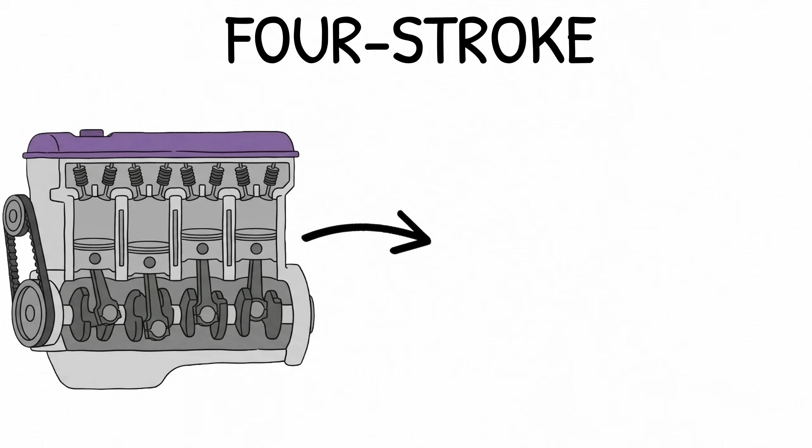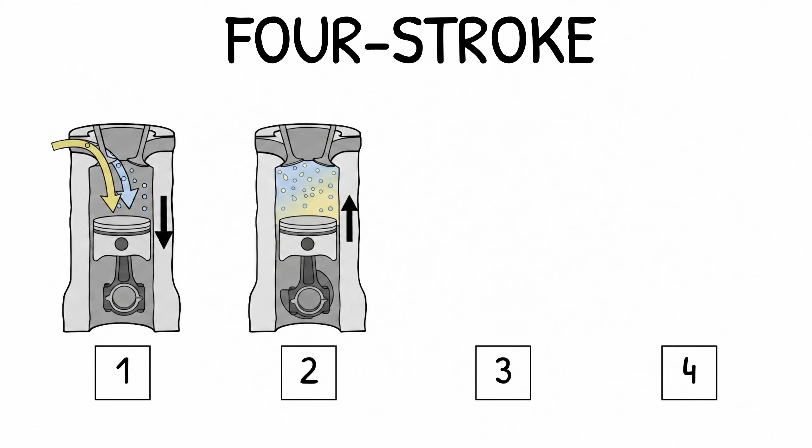Gasoline four-stroke. The engine in most cars runs on a controlled explosion, about 25 of them every second just sitting at idle. A piston drops and pulls in air and fuel. It rises and crushes them into a space the size of a shot glass. A spark hits, bang, and the blast slams the piston back down. It rises once more and shoves the burnt gas out.

Two-stroke. Same explosion, half the steps. It fires every time the piston comes up, instead of every other time. So it makes nearly double the power for its size. That's why it's in chainsaws, dirt bikes, and outboard motors.

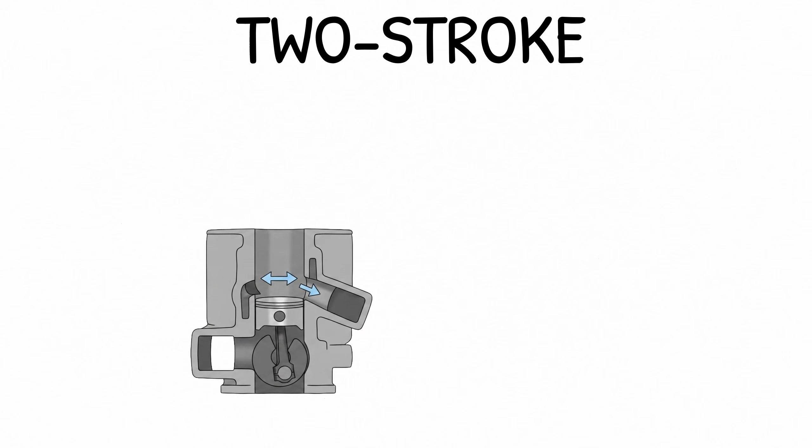The catch is how it breathes. Fresh fuel and burnt gas share the cylinder for a moment, and some fuel escapes unburnt. That blue haze, that smell, that's you literally throwing money out the exhaust.

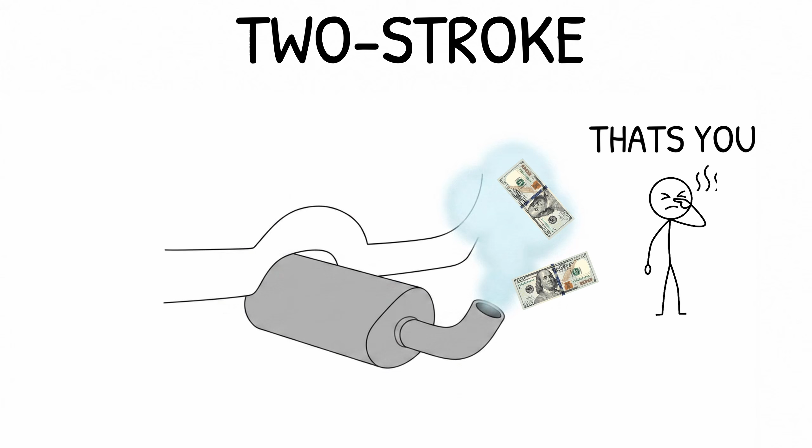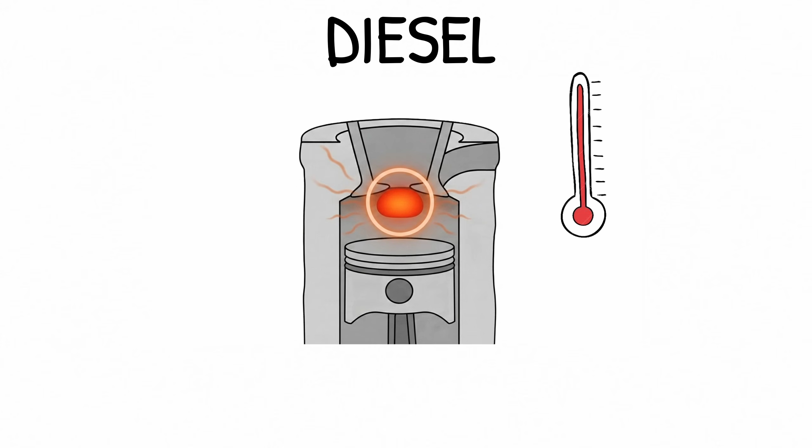Diesel. Now take the spark plug out and throw it away. A diesel never lights its fuel. It crushes the air so hard, so fast, that the air itself turns hot enough to set the fuel off the instant it sprays in. Pure pressure. Nothing to spark, nothing to fail.

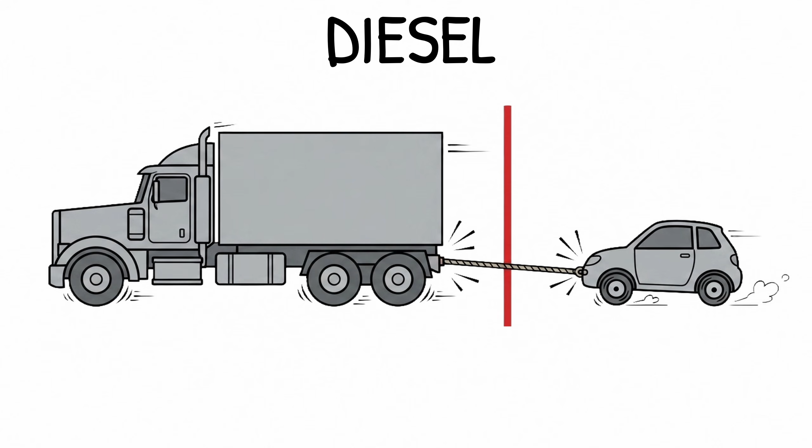Which is why a diesel runs 500,000 miles and outpulls a gas engine down low. It's under every truck, ship, and train you've ever been stuck behind, and it clatters because inside, it really is a chain of tiny, hard detonations.

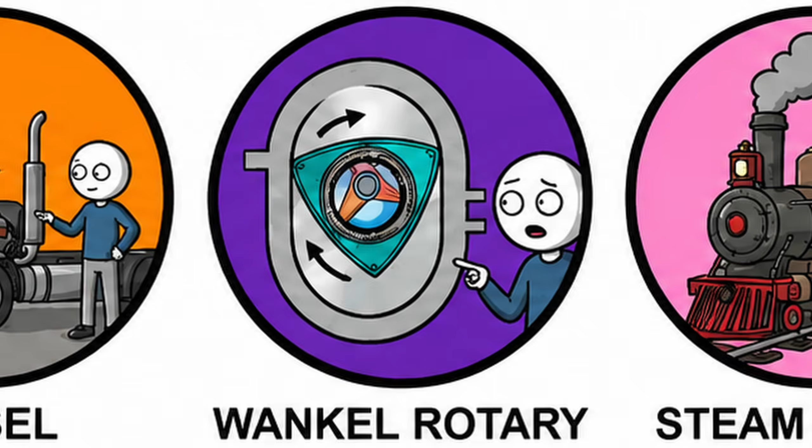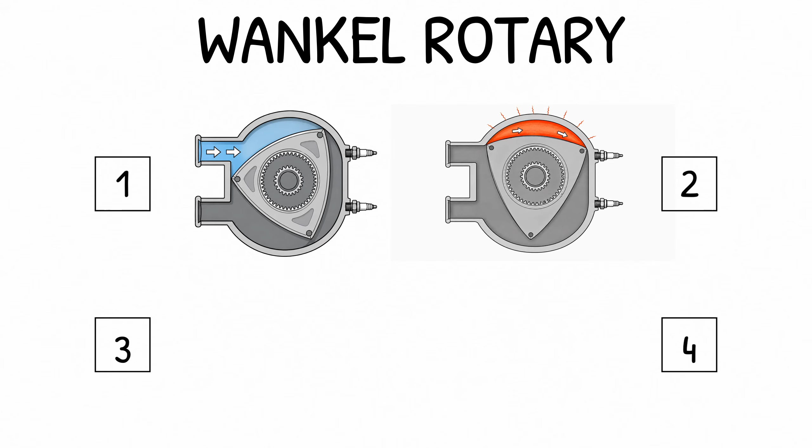Wankel Rotary. And here's the first one that ditches pistons entirely. No pistons, no up and down, just a rounded triangle spinning inside an oval, and the three gaps around it suck, squeeze, bang, and blow as they sweep past. It's tiny, dead smooth, and screams to 9,000 RPM.

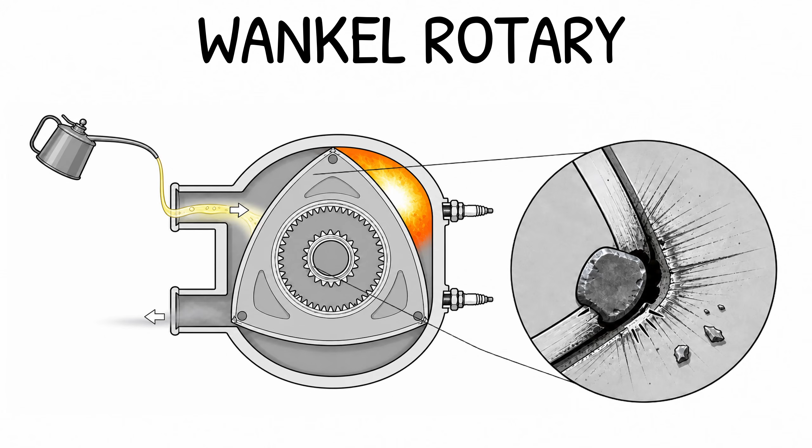Mazda loved it. It also burns oil on purpose and chews through its own seals, which is why almost nobody else builds one. Steam engine.

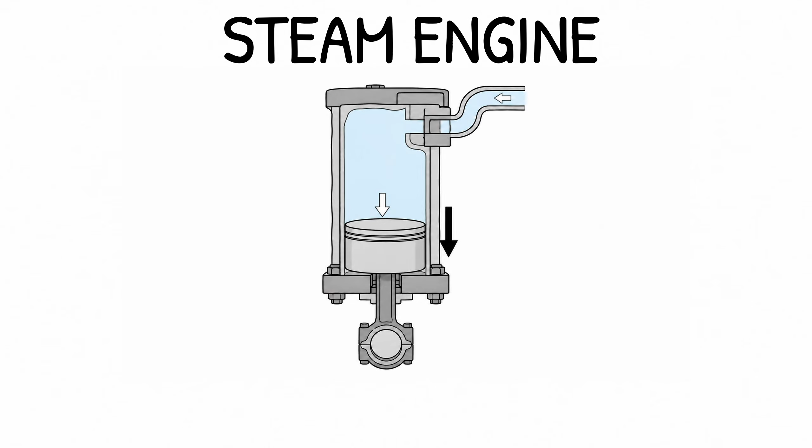Rewind 200 years. Every engine so far burns its fuel inside the cylinder. Steam burns it outside in a fire under a boiler, and all that fire does is boil water. The steam expands, shoves a piston, and that's the whole industrial revolution in one sentence.

Slow, enormous, forever to warm up, but it runs on anything that burns, coal, wood, literally garbage, because the flame never touches the moving parts.

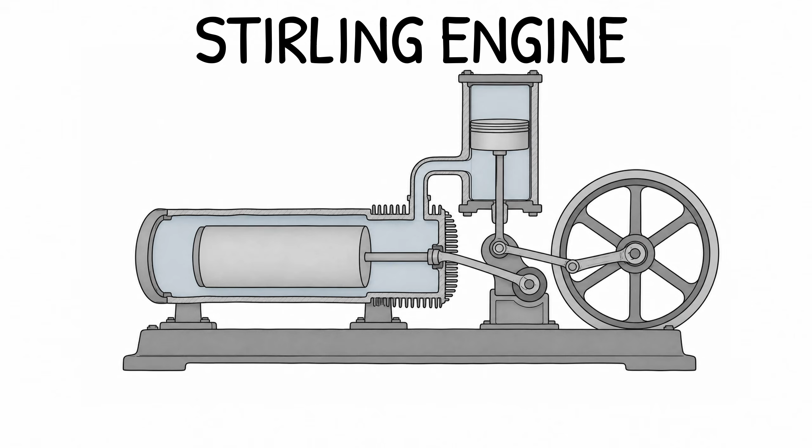Stirling engine. Seal a gas inside, heat one end, cool the other, and as it swells and shrinks sloshing between them, that alone drives a piston back and forth. No explosion. No exhaust. No sound. Some are so delicate they'll spin on nothing but the warmth of your hand on the base.

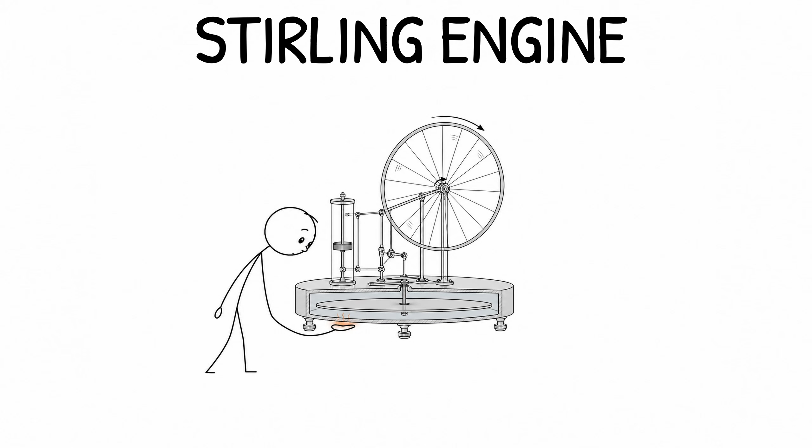Silent, and nearly unbreakable. Which is why it hides inside submarines and spacecraft, where noise or exhaust gets you found.

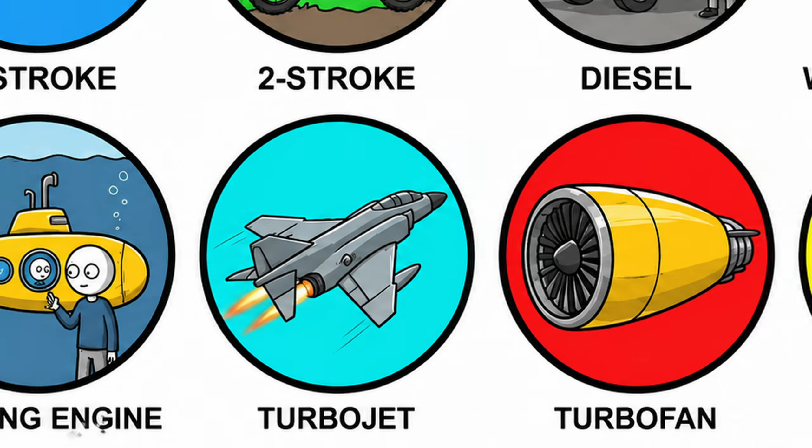Turbojet. Now everything speeds up. Air pours in the front, a compressor squeezes it, fuel burns in a nonstop roar, and the blast tears out the back, spinning a turbine on the way that drives the compressor up front. It feeds itself. No pistons stopping and starting, just one smooth river of fire.

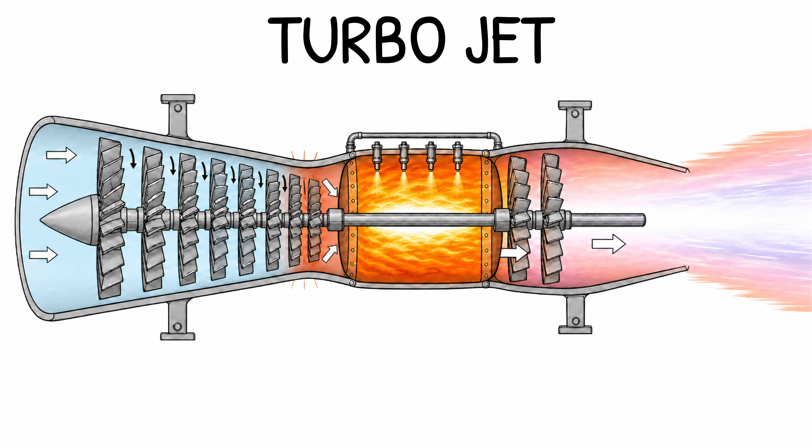This is the engine that put fighter jets past the speed of sound.

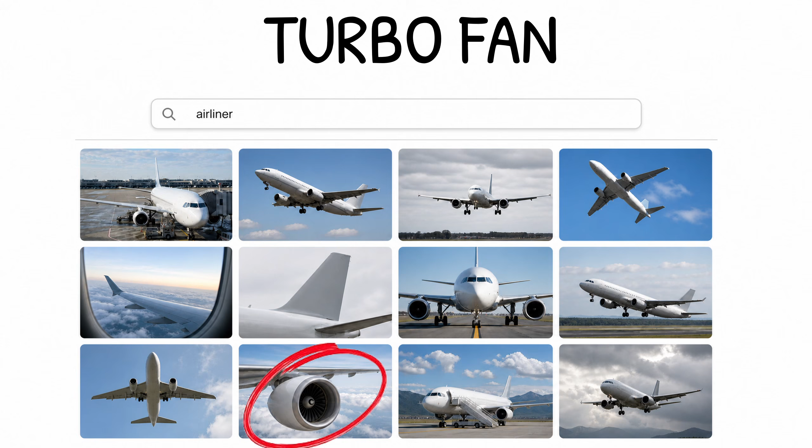Turbofan. Look up at any airliner, this is what's on the wing. It's a turbojet with a giant fan bolted to the nose, and here's the twist: most of the air that fan grabs skips the fire completely and gets shoved backward around the outside. That cold bypass air is quieter and far more efficient at cruising speed. The screaming jet core in the middle is now mostly just there to spin the fan.

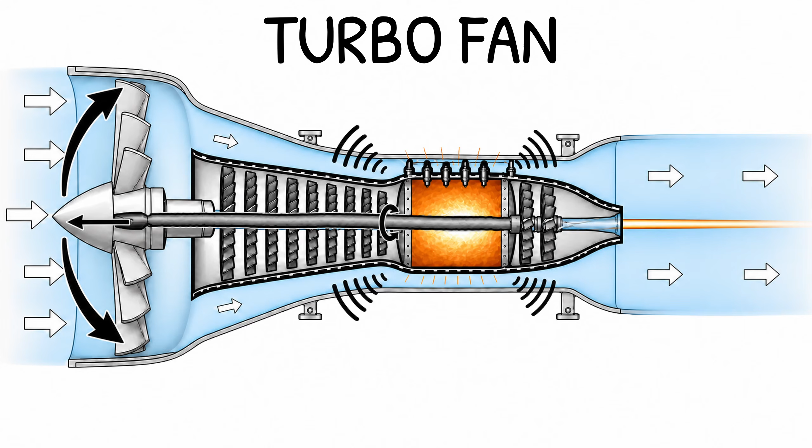Almost everyone watching this has flown behind one.

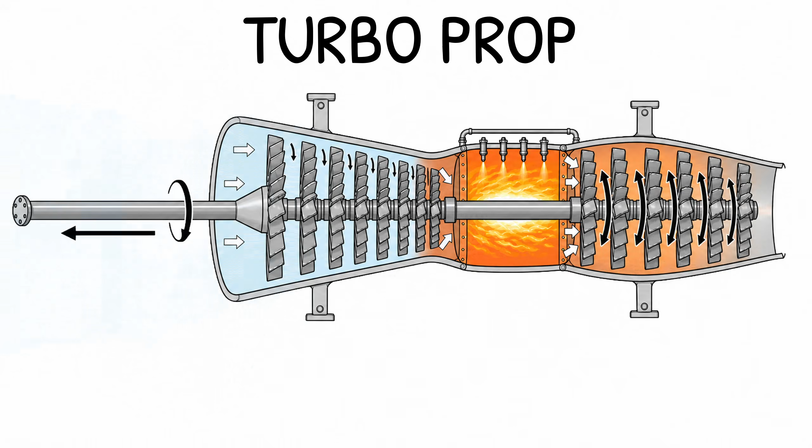Turboprop. Same jet core, but instead of blasting the exhaust out the back, you bleed nearly all of it into spinning a shaft with a propeller bolted to the end. That's what's on most small regional planes, quieter and thriftier than a pure jet down low.

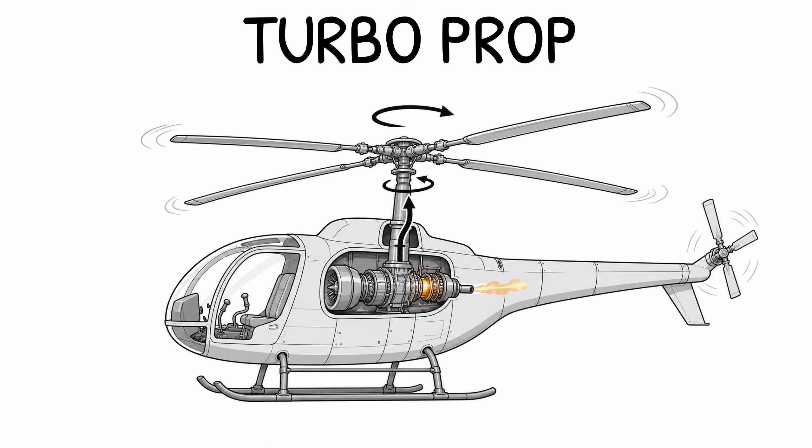Feed that shaft into a gearbox instead, and you've got a turboshaft. The same engine that flies almost every helicopter and drives the turbine inside an M1 Abrams tank.

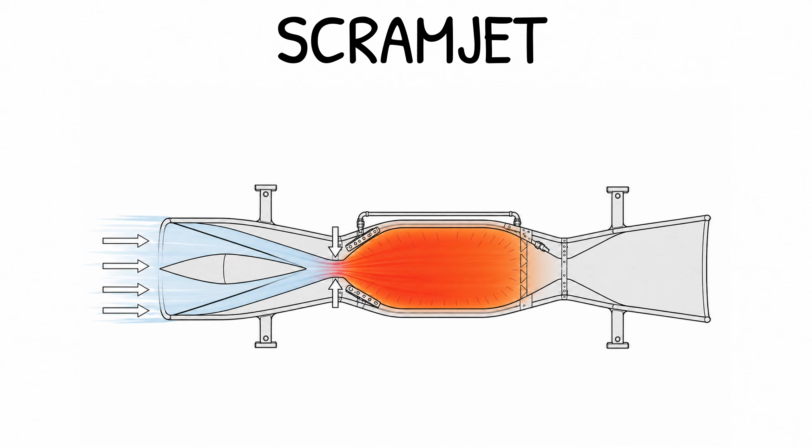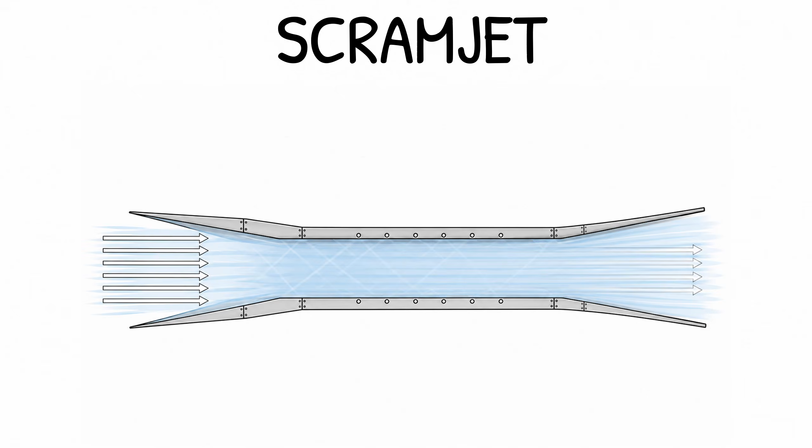Scramjet. Go fast enough and you don't even need a compressor. Raw speed rams the air in and squeezes it for you. But past 5 times the speed of sound, that rammed air would slow so violently it'd tear the engine apart. So a scramjet refuses to slow it down. It burns the fuel while the air is still howling straight through faster than sound. Combustion inside a hurricane in a window a few thousandths of a second wide. It's how you'd cross an ocean in under an hour.

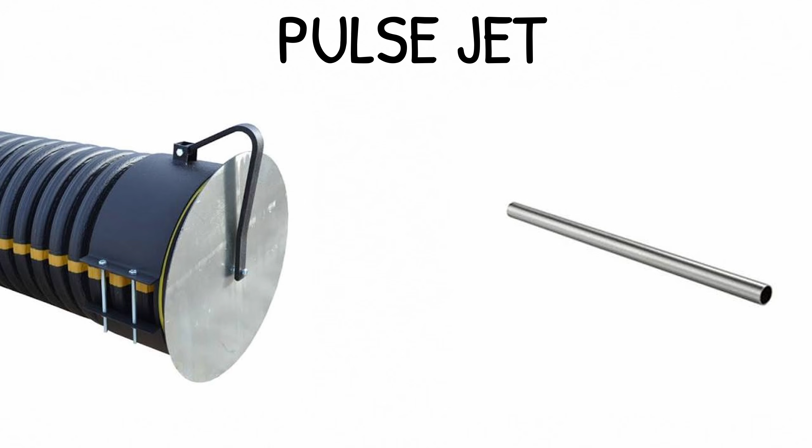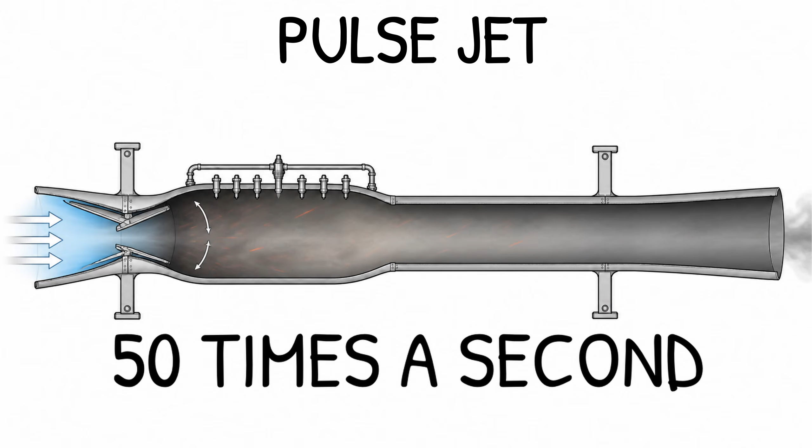Pulsejet. It's barely more than a pipe with a flap on the front. Air gets in, fuel lights. The blast slams the flap shut and fires out the back. Then the flap flops open and it does it again, 50 times a second, with a sound like the devil's own lawnmower. The Germans bolted one to a flying bomb in 1944, and people beneath its path learned to dread the buzzing, and to dread the silence even more, because silence meant it had stopped and started to fall.

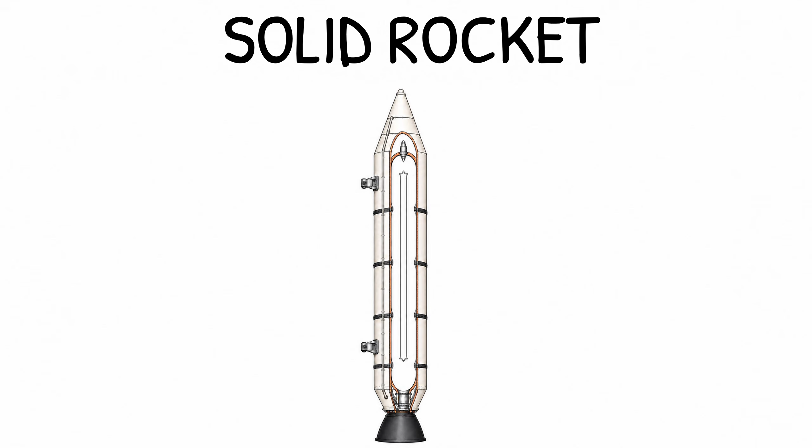Solid rocket, a tube packed with rubbery fuel that already has its oxygen mixed in. Light the top and it burns down like a firework the size of a building. Once it's lit, it burns till it's done and you're just along for the ride. Those are the two boosters strapped to the space shuttle.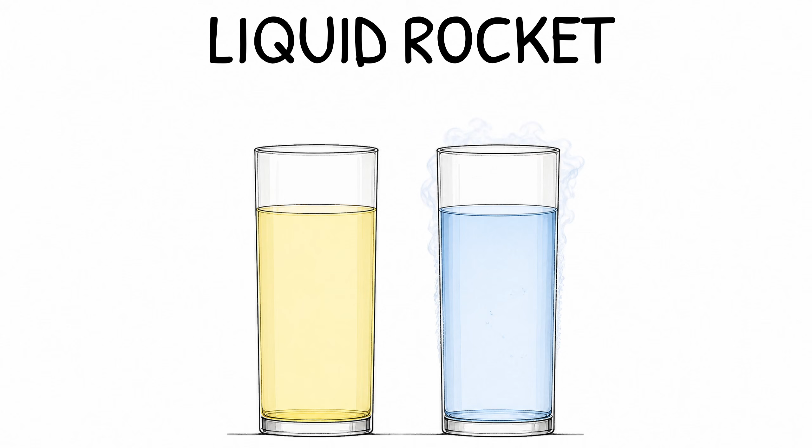Liquid rocket. Two liquids, a fuel and pure oxygen to burn it, pumped into a chamber and lit, making an explosion you can throttle, steer, and switch off. That control is the whole game. It's the difference between a firework and a machine that lands itself back on the pad, upright, balanced on a pillar of its own fire. Everything that has ever carried a human off this planet rode one of these.

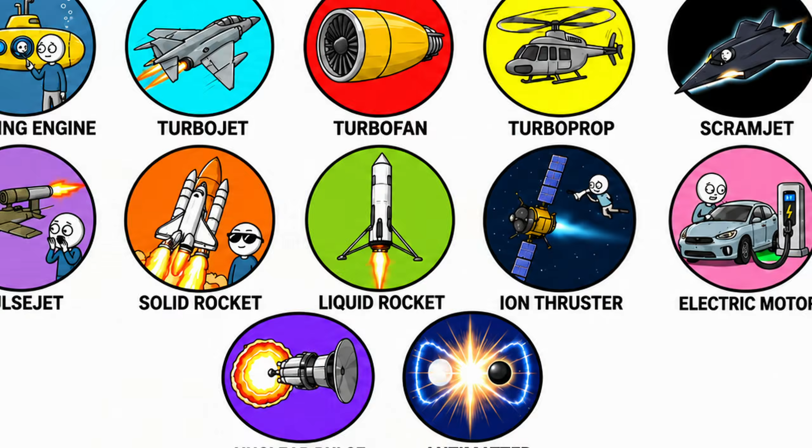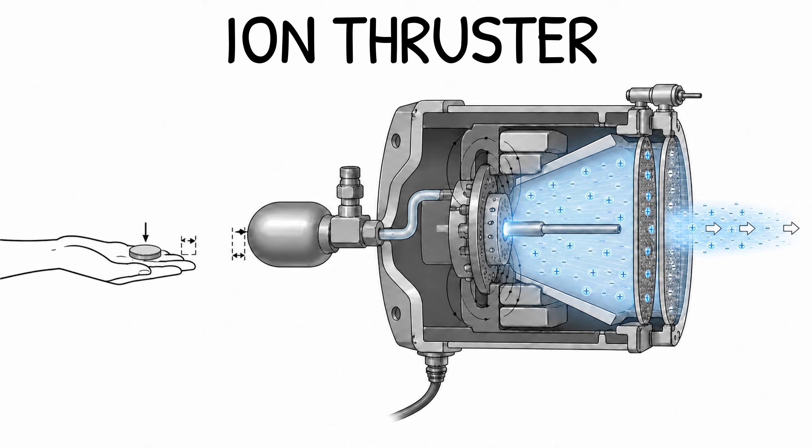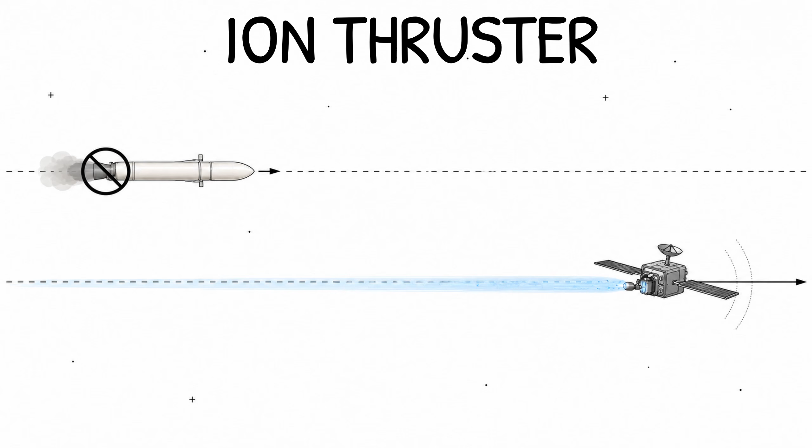Ion thruster. It takes a gas, strips it into charged particles, and flings them out the back on an electric field in a faint blue whisper. The push is almost nothing, less than the weight of a coin resting on your palm. But out in the vacuum, there's nothing to slow it, so it just keeps pushing, day after day for years, quietly winding a probe up to speeds no explosion could ever reach. Patience as a form of power.

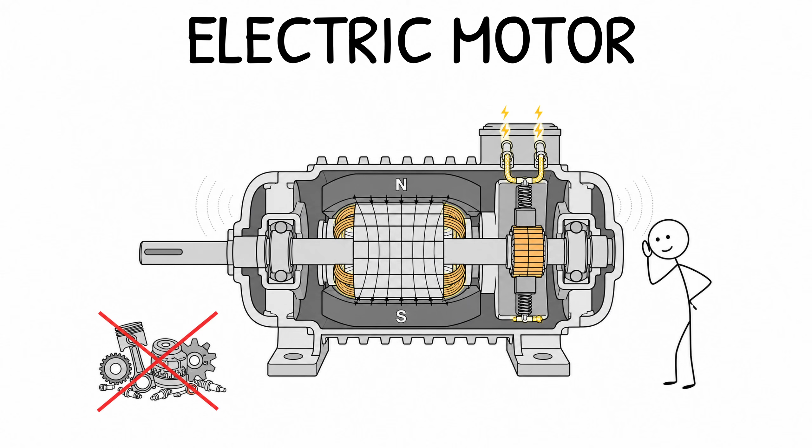Electric motor. An engine burns fuel, a motor just runs on electricity. No combustion here, no heat, no bang. Just magnets and current spinning a shaft with almost no moving parts and almost no noise. But it out-accelerates nearly everything above it from a standstill, which is why the fastest cars on Earth are quietly going electric.

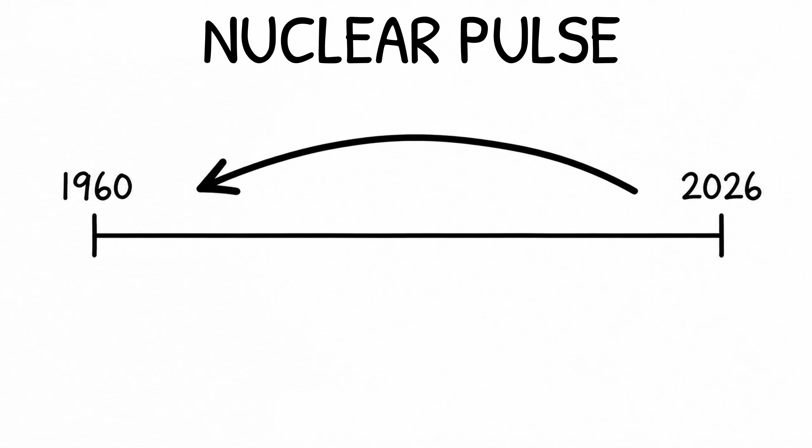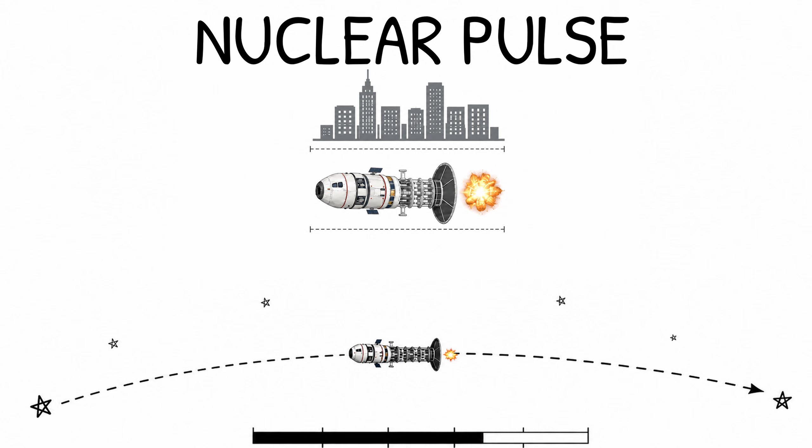Nuclear pulse. In the 1960s, real engineers seriously designed a spaceship that moves by dropping atomic bombs out the back and detonating them, one after another, against a giant steel plate on shock absorbers. Each blast kicks the whole ship forward. It sounds insane. It also would have worked, and it's still the only known way to push something the size of a city to another star inside a human lifetime. They shelved it because setting off hundreds of nuclear bombs in the sky turned out to be, understandably, illegal.

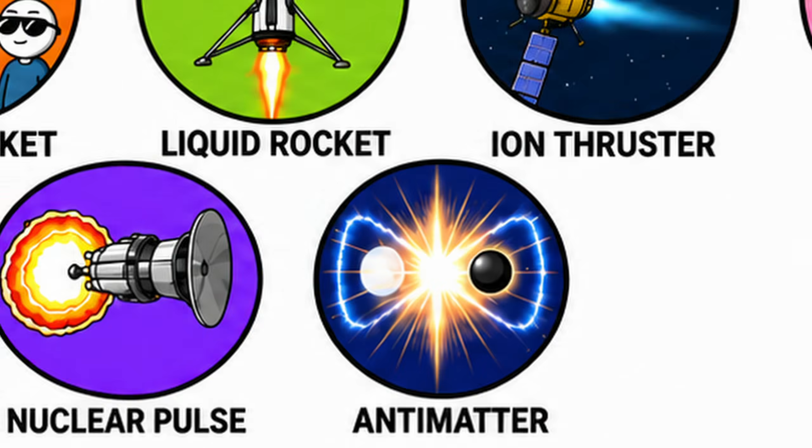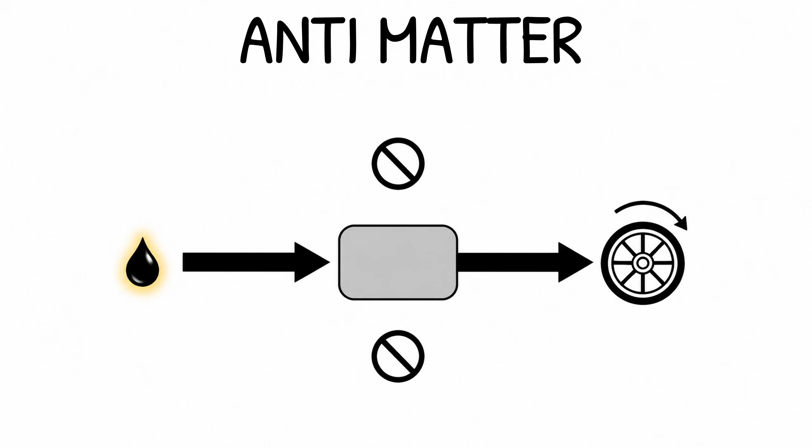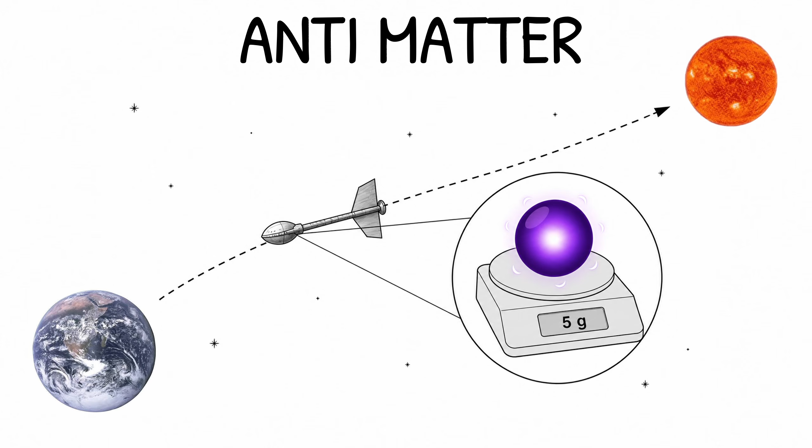Antimatter. Everything else on this list wastes most of its fuel. A little becomes motion. The rest is lost as heat and noise. Antimatter wastes nothing. Bring 1 gram of it together with a gram of ordinary matter, and both vanish entirely into pure energy, the most violent conversion the universe allows. A few grams could carry a ship to another star. The only catch is making it. That single gram would cost more than every economy on Earth combined.